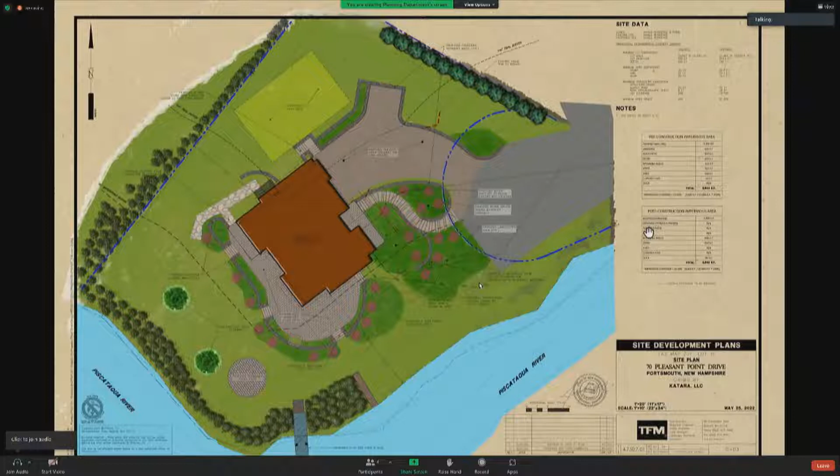I think we're good. Wait, don't have any questions. You wanted to proceed with it now? Is that what you said?

Yeah, we should vote on the first one, I think, at this point. At least discuss it. Is that all right with everybody? Myself and my team, happy to address any questions.

Yes, Jen. I'm not sure, maybe this is part of the wetlands application, but in this packet you talk a lot about the silt socks you're talking about doing on the shoreline. Do you know what type of mesh you're going to be using? I know they have different options. Some are organic, but they do have a polypropylene and polyethylene one, and that would be concerning to me if there's a bunch of plastic mesh sitting right there on the river's edge.

Yeah, I believe that's addressed on our sediment and erosion control plans, and it does reference organic fill. And that would include the mesh from that particular product? That's a good question. I don't remember reading that, I just remember seeing organic fill. There's no plastic, we typically spec the organic mesh, the coconut fibers or similar. That's our typical reference on an erosion sediment control plan. Without reading every note I can't say directly, but I was trying to find it too. There's a lot of words, a lot of stuff in there.

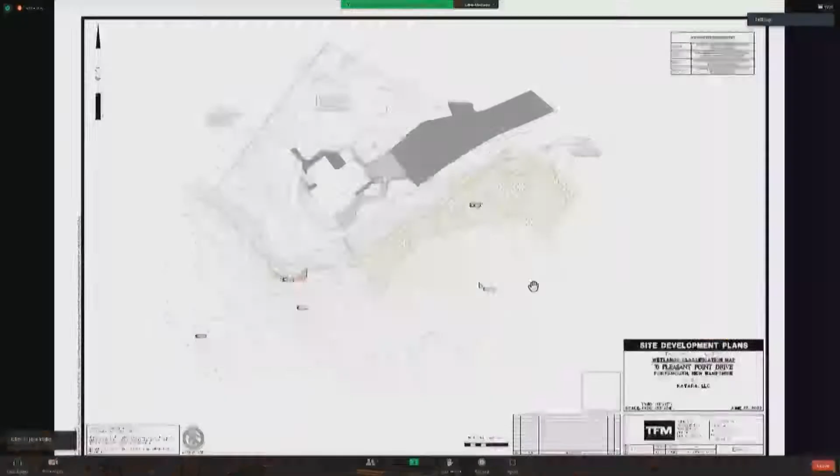Thank you. Yep, the first plan within that wetlands permit application is entitled a wetlands classification map. This plan is required by DES, and it simply classifies the different types of wetland adjacent to the property. There are 4 different types of wetlands, therefore 4 different classifications of wetlands here. The description of each type is located in the upper right-hand corner. You can see there's some salt marsh that has a different classification than the water body, and then based on what's growing and the quality of that wetland and the tidal flats, there's 4 different classifications of wetland.

The second plan is a wetland impact plan, shown as sheet EX02. This plan quantifies total buffer zone impact. The orange area represents the permanent impact. Total permanent impact is 11,993 square feet. The red hatched area represents temporary impact, about 3,750 square feet. All impacts, whether temporary or permanent, with exception of the dock, are within previously developed uplands of the tidal buffer zone. The dock impact from mean high water out to the end of the float represents about 886 square feet of impact.

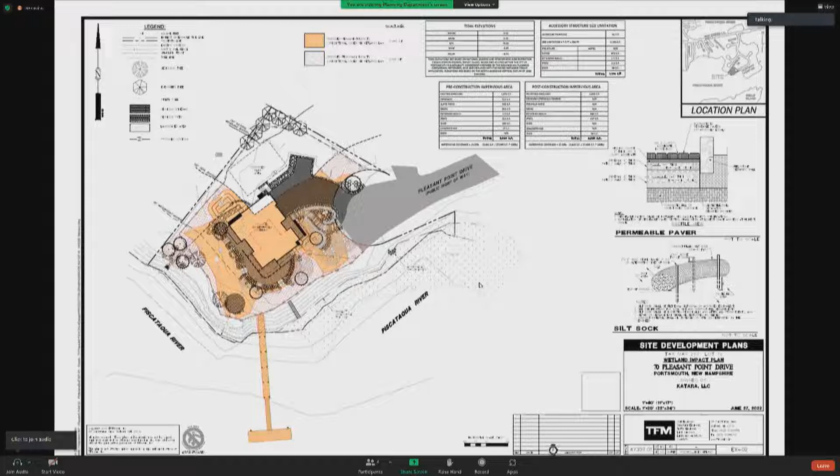The third sheet, labeled EX03, is a shoreland impact plan. This plan demonstrates those impacts beyond 100 feet, the 100-foot tidal buffer zone. Anything beyond this buffer and within 250 feet requires a separate shoreland permit. Impacts proposed within jurisdictional areas of the Shoreland Water Quality Protection Act are a small portion of the home, the driveway, a portion of the retaining wall around the driveway, and yard grading. Permanent shoreland impacts are about 1,200 square feet, and temporary shoreland impacts are about 3,633 square feet.

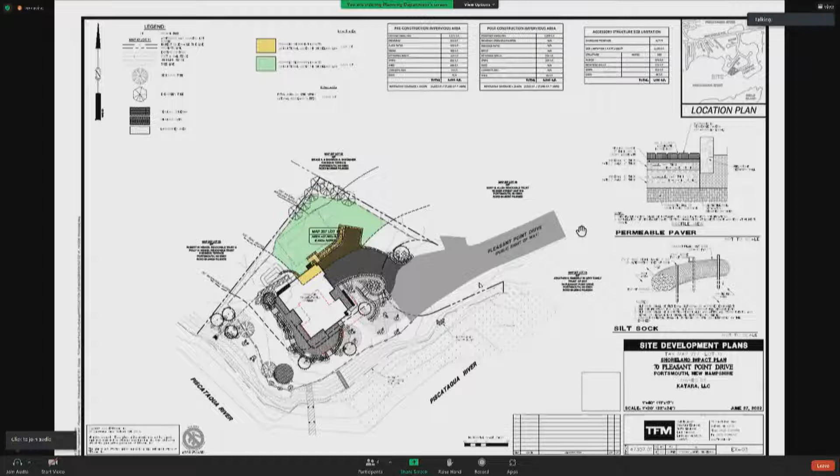EX04 is a vulnerability assessment. This plan demonstrates the site's vulnerability to relative sea level rise and projected mean higher high water elevations. The plan view on the left depicts the current location of the mean tide line, the mean high water, and the mean higher high water with reference to this site. The plan view on the right depicts the same three lines for the year 2100. Because the site's elevation is steep, elevated, and has banks adjacent to the resource, the site has a very high degree of tolerance for flood risk, and no action is required.

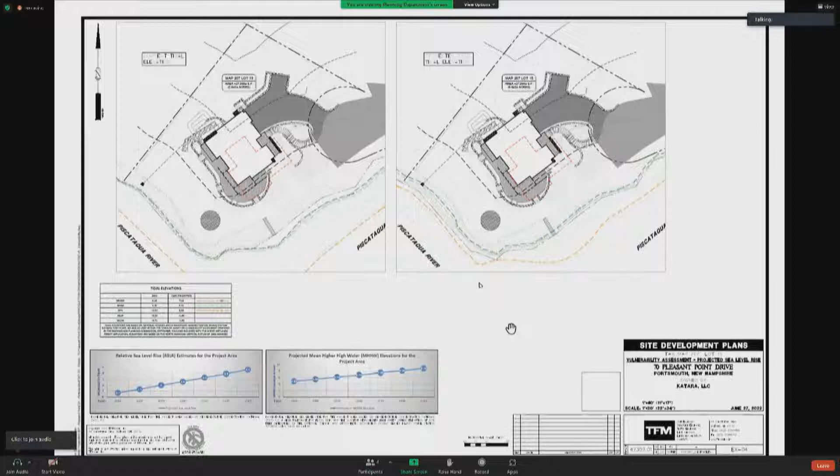Sheets 5, 6, and 7 are dock-related plans. Sheet 5 depicts the dock location with reference to the site, the mean tide line, and the mean high water. This plan also provides the dimension of the pier, the gangway, and the float. The right side of this plan depicts the proposed dock in relationship to the existing and proposed dock across the back channel of the river on Lady Isle.

Commission members may recall, I think it was three, maybe four months ago, was before this commission permitting that dock on Lady Isle, just across the back channel. So on the right-hand inset, it shows the entire resource from bank to bank and its relationship to that dock that was recently permitted a few months ago.

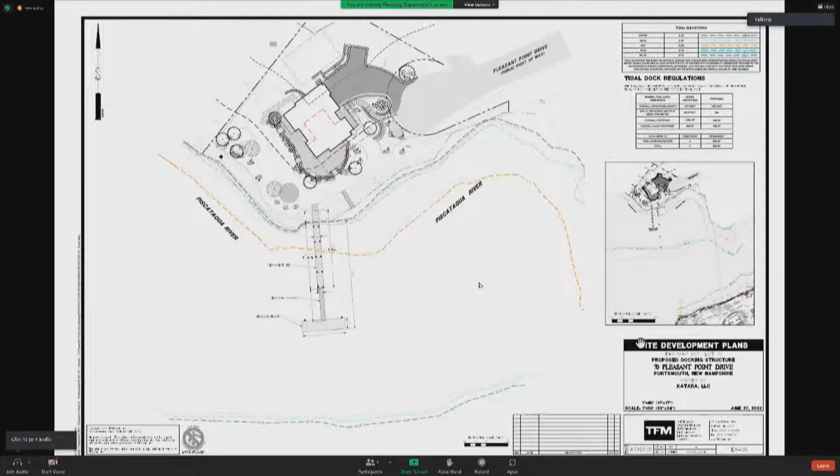Sheet 6 provides the dock details, a cross-section. It provides construction notes for the contractor, who will be, we believe, Riverside and Pickering Marine, and a profile depicting the dock with the mean tide line and the mean high water elevations below. The elevations shown here are as they exist today, where sheet 7 depicts the dock with reference to those three lines, mean tide line and mean high water, as projected for the year 2100.

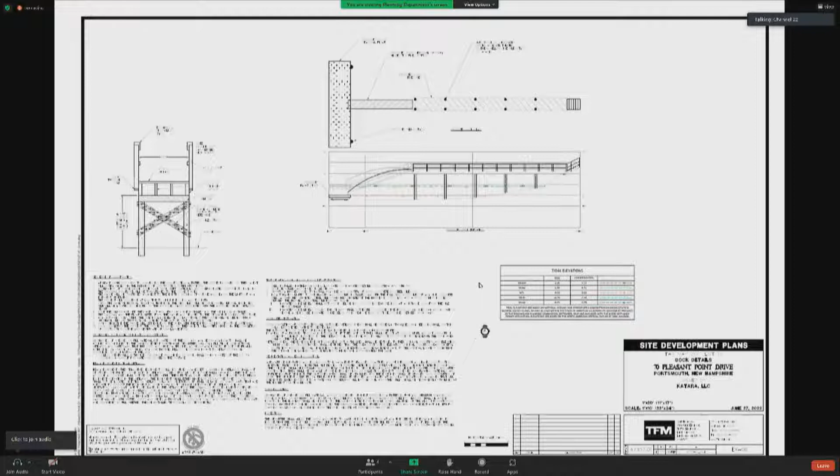Don't want to go through the entire wetlands permit, however, we have prepared some slides that summarize the application. If we could bring up those slides, please, Peter. I'll take you briefly through those.

And that is this document.

Cory: Sorry, I just had a question. So the pier and gangway will be taken off site to be stored?

Yeah, it has to come out. The dock, pier, and gangway has to come out. The gangway and float have to come out, and the pier as well. Yes, that's correct. And it's going to be stored off site? I don't think there's room on site. Becky, it'll be stored off site? Yes, it'll be stored off site.

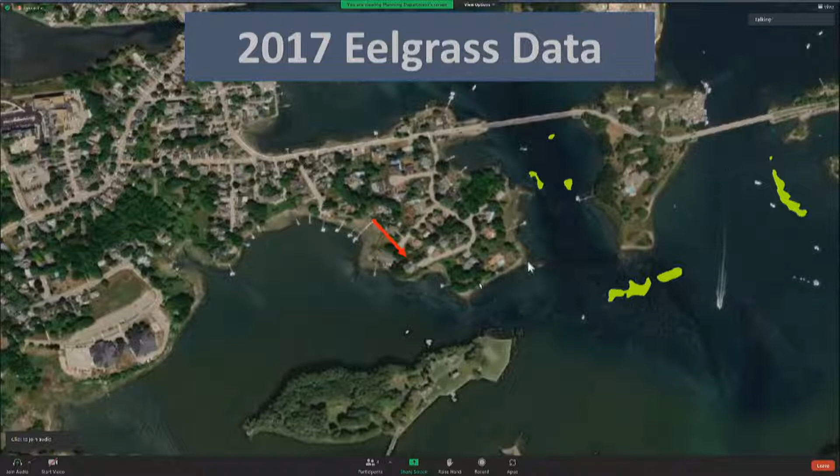That means these beds are growing, but still our site has no impact to these eelgrass beds, nor will the dock that we're proposing have any impact, because they are quite a distance away. This site has a data layer required by DES that requires us to look and determine the prevalence of shellfish. They are in the area.

However, next slide please. You can see that this site, or this water body, is closed to shellfishing. Although they're in this adjacent resource, there is no shellfishing allowed in that back channel of the Piscataqua River.

The next slide shows the salt marsh data. This represents the salt marsh in the area, which was also observed at our site walk. You can see that thin band in front of the home, which expands quite a bit as we go eastward.

The next slide is the UNH SLAMM model. Those of you not familiar with the SLAMM model, it's a sea level affecting marshes model, which was done by the University of New Hampshire. This slide shows with 1.5 feet of sea level rise, there is no effect really on that salt marsh to this site. The next slide shows the SLAMM model with 3 feet of sea level rise.

And again, because of these steep banks going down, there is very little salt marsh migration proposed adjacent to this site. There is salt marsh migration, I think, with sea level rise on the outskirts, but not adjacent to this site because of its steep banks and higher elevation.

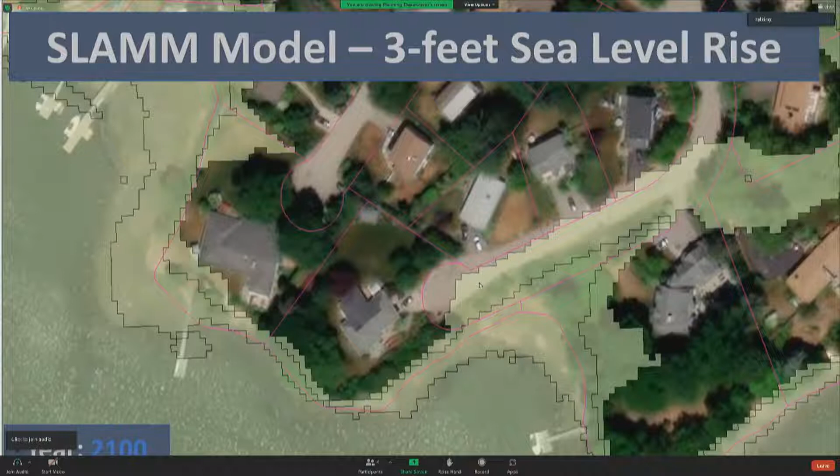One thing I'm not sure we noted previously, but the property to the west, and then just to the west of that, there is a prime wetland. And that prime wetland has a 100-foot buffer. That 100-foot buffer does extend onto this site.

However, the only thing we're proposing in it is in the northwest corner, and the only thing we're proposing is some plantings and invasive species management. There is no impact other than plantings on the site within that 100-foot buffer. The purpose of this slide was just to demonstrate there is a prime wetland buffer there, but we're not going into it other than plantings and invasive species management.

The next slide demonstrates the New Hampshire Fish and Game highest ranked habitat in New Hampshire, and that's the pink area. While high-ranking habitat is nearby in the adjacent water body and salt marsh, it is not on the subject property.

The next slide is part of the wetlands application. We're required to do a coastal functional assessment. The next slide shows the results of that functional assessment.

This shows the adjacent wetland system is suited for a number of principal functions and values. The principal functions and values of that adjacent wetland are flood flow alteration, fish and shellfish habitat, sediment and toxicant retention, nutrient removal, production export, sediment shoreline stabilization, wildlife habitat, endangered species habitat, and ecological integrity. The overall ecological integrity score was 0.65, with 1 being the highest you can achieve. So its ecological integrity is above average.

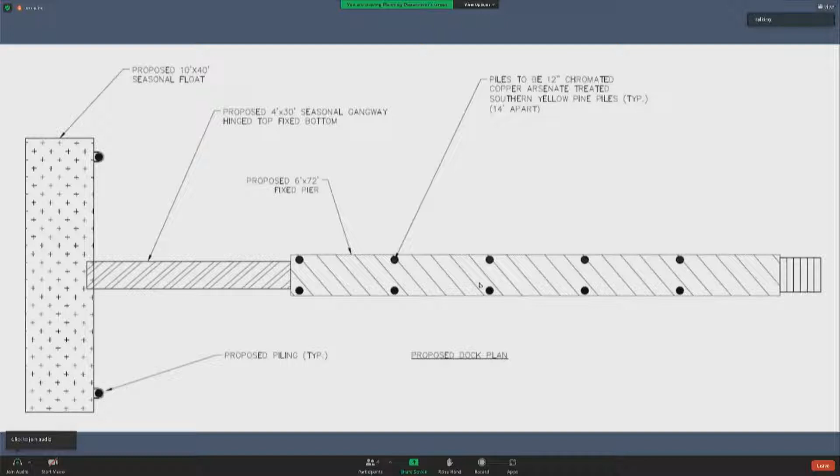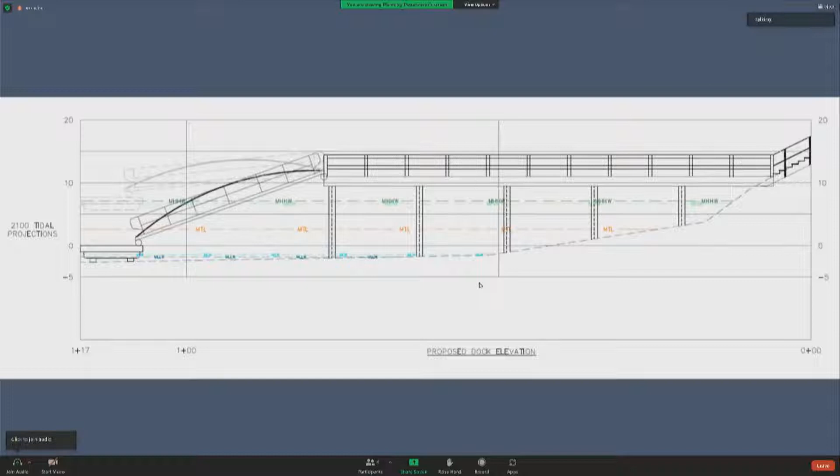Lastly, there's a slide that demonstrates the dock's proximity to the site, showing the pier, gangway, and float.

The next slide covers the DES tidal dock regulations. The DES maximum length is 200 feet; our dock is 100, half of that. We're allowed to go to 25% of waterway width at mean low water. In other words, DES would allow us to extend this dock 86 feet beyond mean low water to get that 25% width.

We're not even going up to mean low water; we're staying far short of that. The overall footprint allowed by DES is 1,500 square feet, and our docking structure is 886 square feet, a little more than half of what's allowed. The float footprint is maxed out, mainly due to boat slips, allowing a boat to dock there. It's 40 by 10 — you need that 40 feet to dock a boat.

As part of this permit, we've coordinated with other state and federal agencies, including the Chief Harbor Master, Tracy Shattuck, who issued a statement within the application that the proposed docking structure will have no negative effect on navigation in the channel.

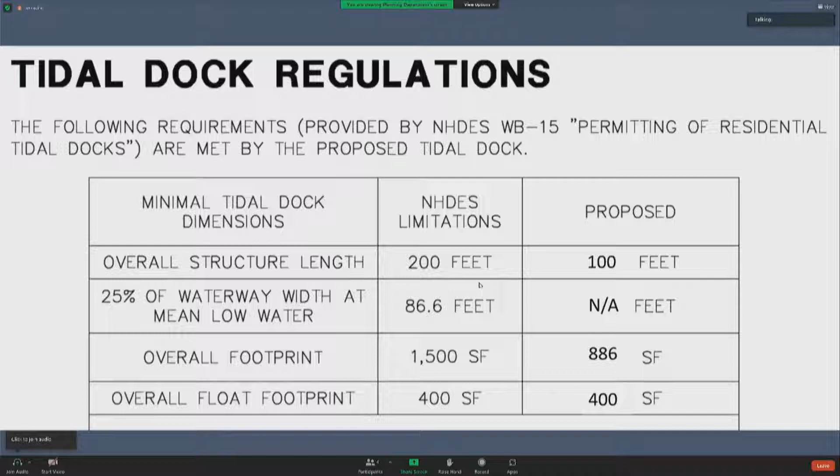We've also coordinated with the New Hampshire Natural Heritage Bureau, which determined that marsh elder is on this property, away from the impact area. The next slide shows the location of the marsh elder, circled in red, and its relationship to the impact of the site. This marsh elder is to be preserved, as there's no construction activity proposed within close proximity to it.

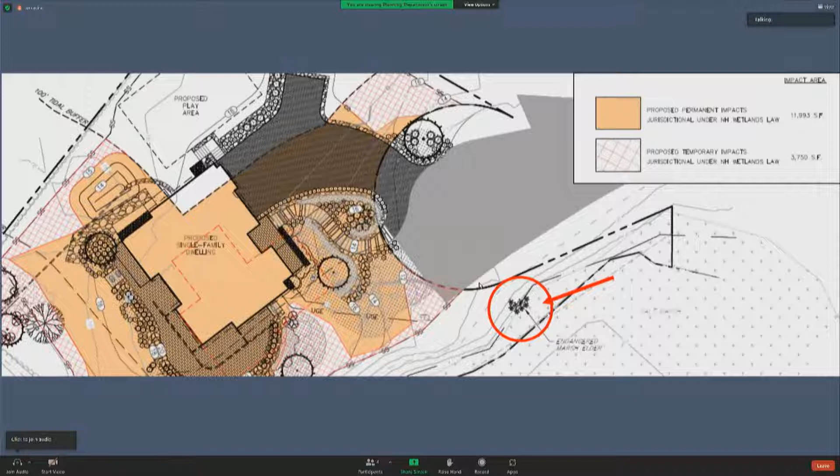Lastly, we've coordinated with the New Hampshire Natural Heritage Bureau's Jessica Bouchard, who issued a statement of no concerns about impacting the marsh elder as a result of this project.

We've also consulted and coordinated with marine biologist Mike Dion of the New Hampshire Fish and Game Department, who issued a statement that this project will not adversely affect sturgeon species. You're probably aware there's the Atlantic and short-nosed sturgeon species prevalent in this Back Bay channel, and that's really why there's a restriction on dock construction in late winter, so as not to impact those species.

So that's a summary of the state dredge and fill permit application, which includes both tidal buffer zone impact for the new home as well as the plantings and the docking structure. Happy to address any questions.

Thanks, Corey, I will start. I do have one question regarding the kayaks and the kayak rack structure that was at the bottom of the stairs — will all that move to the dock now?

No, the kayak rack is intended to stay where it is. The reason being, as you come down the stairs, they wanted the kayak next to the stairs, on a flat area. If we move it over to the dock, that would mean the kayaks would be in the water.

In order to reduce the stormwater going in their direction, we have a holding tank area that's actually going to divert it back towards this low spot. And that's mainly for the reason that we can't increase stormwater in any direction. We have to look at all of our outfalls and make sure we have a decrease in every direction. So most of the stormwater heads to this low point here.

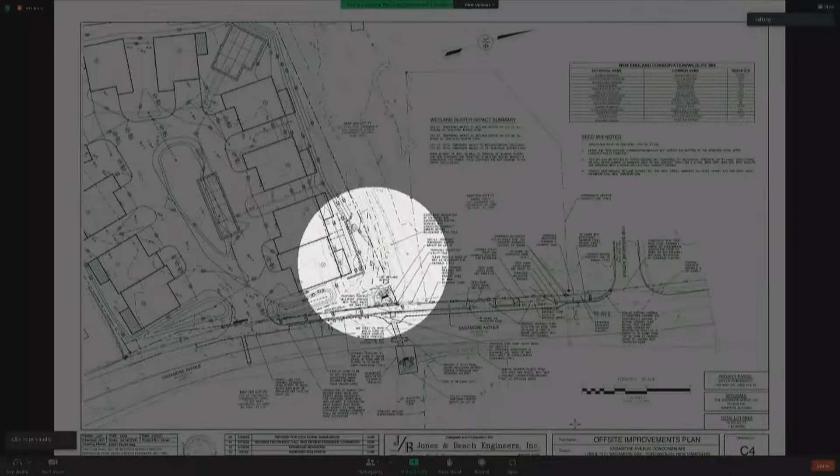But there's a small percentage that does head out back towards Sea Cove condos behind us, but we'll be stopping that. They have a detention pond right on the other side of our property line also that we were trying not to have our water go into.

Other questions? Samantha? Okay. Samantha does have a question. She does. Oh, good. Samantha?

The staff memo recommended a one-year-long monitoring plan of the invasive species that were removed, and then the planting plan. Is that something you're amenable to? Yes.

And then my other question was if you were also amenable to practicing organic land care management practices on your larger parcel there, as all that is ultimately going to flow into the wetland area, even though it will be treated. Is this reference to the NOFA standards? Yeah. You familiar with those at all? Jim is. That sounds fine, right?

I'm getting one yes and one 'I don't know what it is.' Okay.

I assume it's basically no high strength fertilizers, low strength - eliminating synthetic pesticides and fertilizers. That sounds fine, and that's something we can add, both of those would obviously be conditions of anything you vote on and can be added in the condominium documents too. Great, thank you.

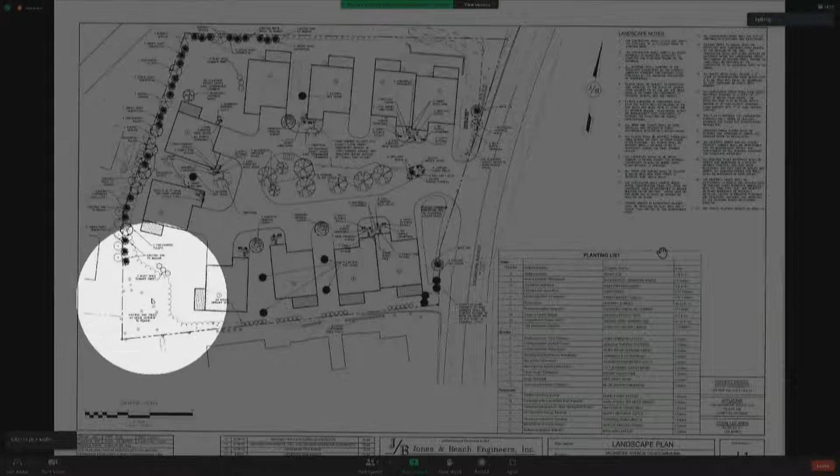And then we have the ability to keep some of the trees over in this corner as well, but the rest of them pretty much are going to have to be cut and replanted for the construction of the houses, the driveways, and the stormwater system.

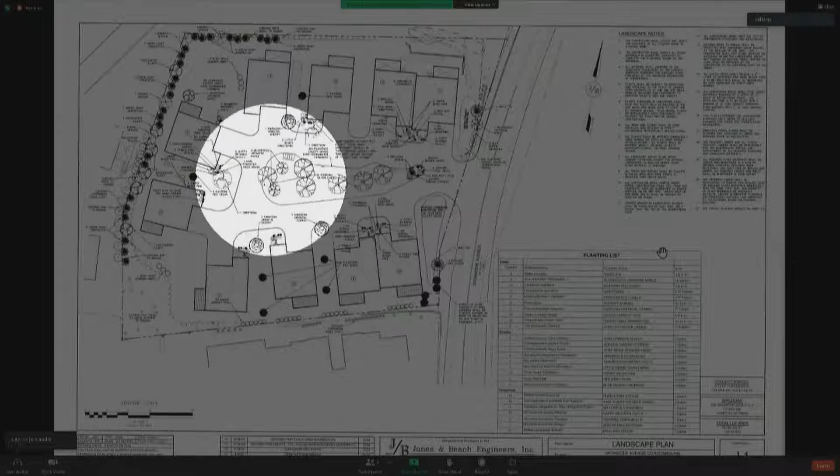And then this is the trees to be replanted. We have a thick buffer along these two property lines. We have an agreement with the abutters. Some of these trees are actually on their land to even help buffer their property more. We have a large green space area in the middle, and then we'll have planting for each of the units and between the units. So we'll have to replant a lot of the existing trees that are out there.

But we're able to, I think, do that with lots of green space around this. It looks better in color, but you'll see that there's quite a bit of space for green.

I think there's no other question. I'm going to go out on a reach a little bit too, on the other property, just to ask a question about the snow storage, because it kind of connects with a little bit what's going on in the culvert on the outfall there. My understanding is that where you're storing the snow, in the center there, there's underground storage of stormwater, and then that outlets to the culvert?

Is that right? Everything gets treated before it gets outletted. So everything on our site, any of the rain or snow that's on the pavement or in that center area gets treated before it has an outfall. So even the snow will be treated if it's stored there. Any of the snow around the outside of the edge of pavements gets picked up and brought into treatment areas. So there is adequate space for both snow storage and the stormwater treatment.

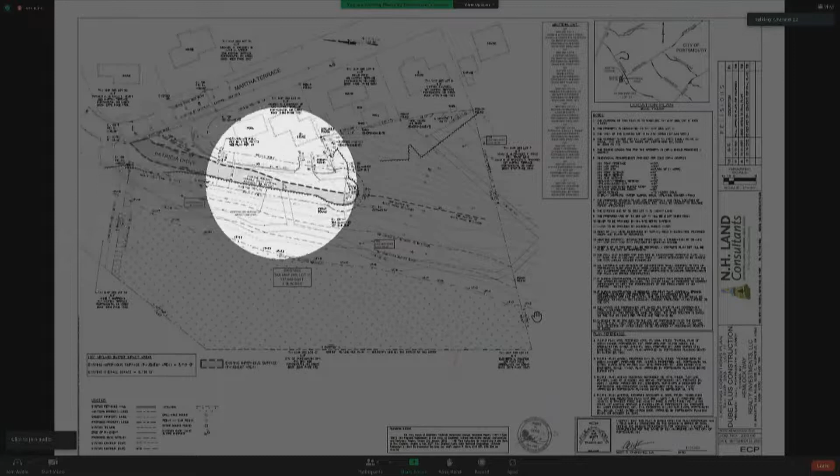There's an existing roadway infrastructure already in place along this right-of-way, right off of Martha Terrace. It was intended at one point for the road to go here, shown on the plan. I think it's the top button. So this right-of-way here is existing, both on paper and in the field. There's existing pavement and existing drainage infrastructure in place, and it's currently, as depicted in the darker shade... I'm pressing the wrong button again.

The darker shaded area is the current area of impact that's in the prime wetland buffer. So we're looking to actually have a reduction in the total prime wetland buffer by removing all the existing asphalt and repaving the road narrower. I believe we're doing 18 feet versus the 20 to 24 foot wide pavement that's out there now. We weren't able to determine the exact existing width, but we probed and figure it's about 20 to 24 feet wide currently. So we'll end up with a reduction in impervious surface within the buffer.

But because we are impacting the buffer, we needed to go before this commission and the planning board for a conditional use permit. We've also gone before the state NHDES for a prime wetland buffer impact. We've received those permits, and we're also having to pay into the compensatory mitigation program, the ARM fund, for the impacts.

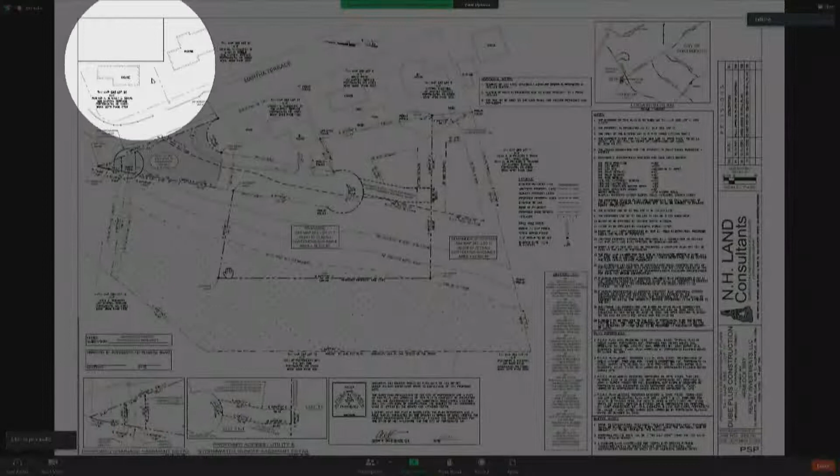That section of the right-of-way was actually dedicated as part of the plat recordation back in 1960-something, along with all of Martha Terrace. So the Martha Terrace roadway and this little section of roadway was dedicated and accepted by the city, so it's owned by the city. The rest of the right-of-way is owned by the abutting parcel, so the rest of the unshaded area here is all owned by the abutters to the north and south of the right-of-way.

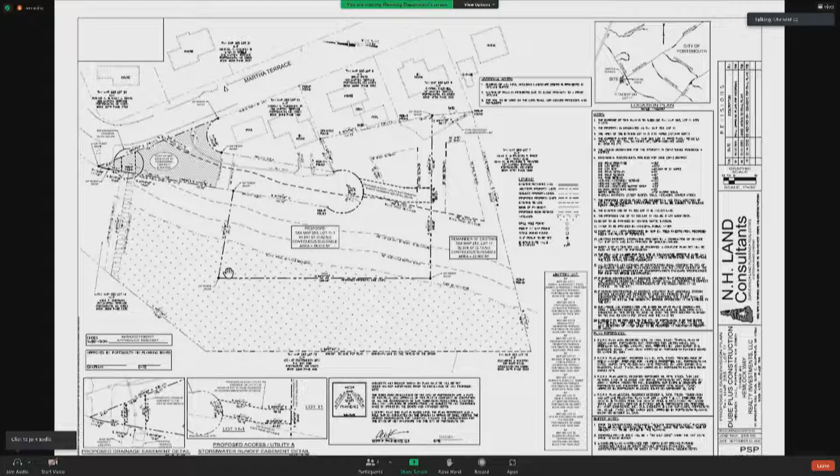So, having not been on the site, I'm wondering why the road couldn't swing further away, toward that 100-foot buffer line, if we swing it a little bit further that way. Is it because there are a bunch of trees there? If so, I don't want to bother them.

So I'm saying, through that right-of-way, why can't we move it closer to the 100-foot prime wetland buffer you have delineated? I'm wondering why we can't curve the road a little further away from the wetland itself.

Well, two things. One is that we're mimicking the existing roadway, so all we're really doing is removing the asphalt and repaving in the exact same spot, which is already disturbed area.

Secondly, along the easterly side of the property, if you can see where my cursor is in the middle of this circle, there's a retaining wall that runs all the way along this edge of the roadway, and it's a significant grade change.

There may be, it may be shown in the photos, Peter. Actually, on this plan it's hard to see, but on this sheet there's topo that shows it's a little steeper up there. It's like a hill.

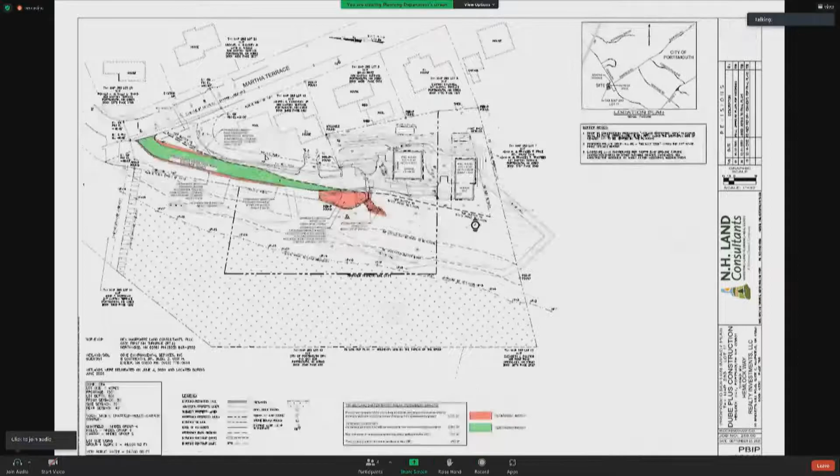And Peter, if you look at the photos I submitted along with the CUP application, you'll see. There should be a photo showing that retaining wall. So we're getting as close to that wall as we can, and you can see the pavement. It's in good shape, but it was paved back in the early 70s.

It was all constructed, and then we're maintaining all of those trees on the westerly side of the right-of-way. Those have all been marked with conservation flag tags, so no cutting, what have you.

Another question is, why can't the snow storage be next to the houses?

Well, as it's designed, the snow would be pushed—Peter, I don't know if you can go to, I think there's two sheets in where it shows the driveway plan. So the snow storage would naturally be, as they're plowing, they're going to wing it to either side. I guess they could look to winging it towards the easterly side of the road.

And that would allow the snow to melt and get into the collection, into the drainage structure, which is a proposed rain garden. Ultimately it's going to be pushed as they're plowing, because it'll be one plow operator doing the roadway and the driveways. It'll be privately maintained.

It's going to be privately maintained? It is, yep, the roadway will be all privately maintained. So that one area we were talking about before is part of the city's right-of-way, the city council is deeding that back to the landowners, so it'll all be privately maintained.

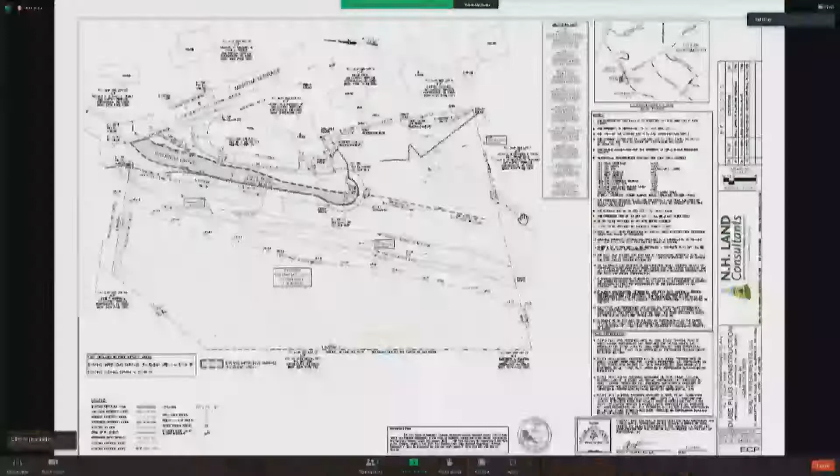Have they owned it ever since? Yes, since the 70s, they had owned it for many years. I'm not exactly sure how many years they owned it, but we recently acquired it, I believe in July of 2021. Who recently acquired? We did - Hemlock Realty Investments LLC is current owner of the property.

So it's spot on spec - you're going to build two houses, and they're both going to be sold to somebody not in your family. Probably, more than likely, correct, yes. Okay.

I guess that's all I've got. Okay, thanks. Lynn? I had sort of a similar question, just thinking about - I know our role is really just to look at the road, which is in the 100-foot buffer - but just to clarify, so you're building two homes, and then does this road open up any additional space for development down the road?

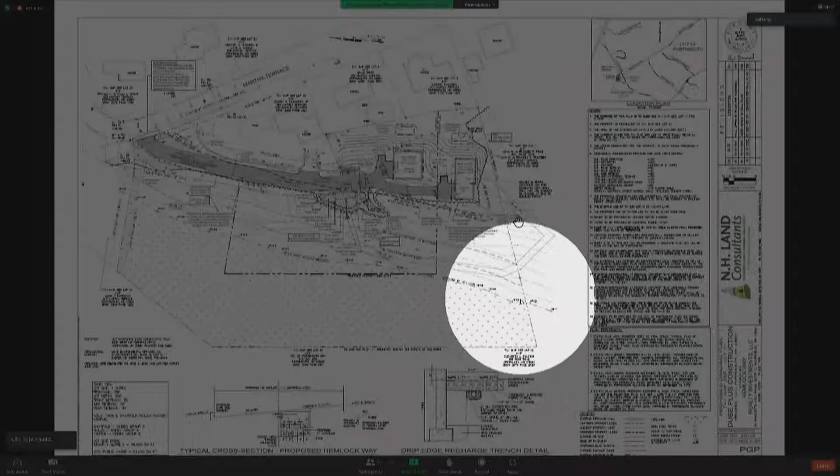It doesn't. So the property line is right here - this property line is the end of our property, and it's undeveloped land back in here. The road was intended, if you look at the old subdivision plans, to go all the way through and then back up to another Patricia Drive on the other side, but it ends in another cul-de-sac.

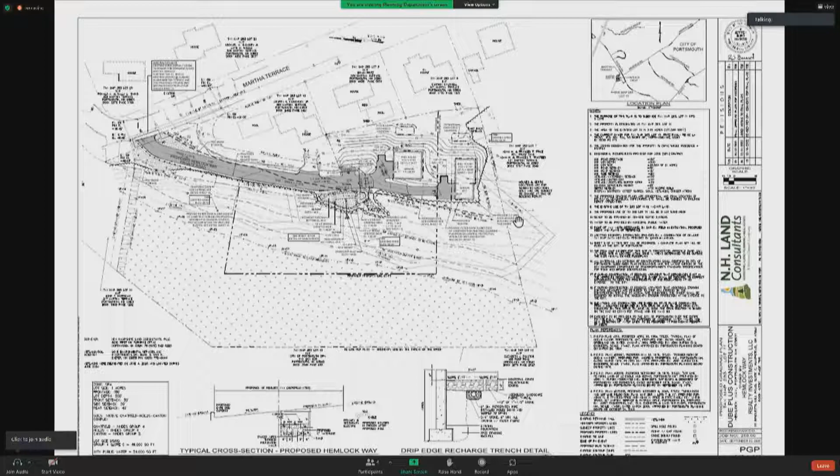It was intended to connect there, and the plan was to do - can't recall how many lots there were in a future phase, might have been another 15 lots or something like that. But that can't happen going forward, because we have no ownership of that parcel, and per this plan there will be two homes in the way, so I don't think there will be any ability to connect through.

And I'm assuming that's part of your role, Peter, looking at long-term planning - is this an area where you're hoping to have some additional residential development? No, but if the property meets the zoning and they can figure out access - there would be, I think it would be really challenging in this location because it's so steep back there, and there's no connection without going through private property. So there's no other right-of-way that would connect to this that I'm aware of.

So they would basically have to create a road through someone's yard. Right, yeah, so I think this is going to be the end of that development. These are just the last two outparcels they were able to use—like you said, there was a lot more platted, but it never came to fruition. So this is what they came up with in terms of a design that would work with the new wetland regulations. Right, okay, so if they had built it back in '69, they probably wouldn't have had to deal with the wetland regulations—there wouldn't have been prime wetlands. But since they didn't, they're more limited on their site here.

Okay, that makes sense, thanks for that background, because I missed it—I wasn't here for the first time you came before the commission. I do have a follow-up.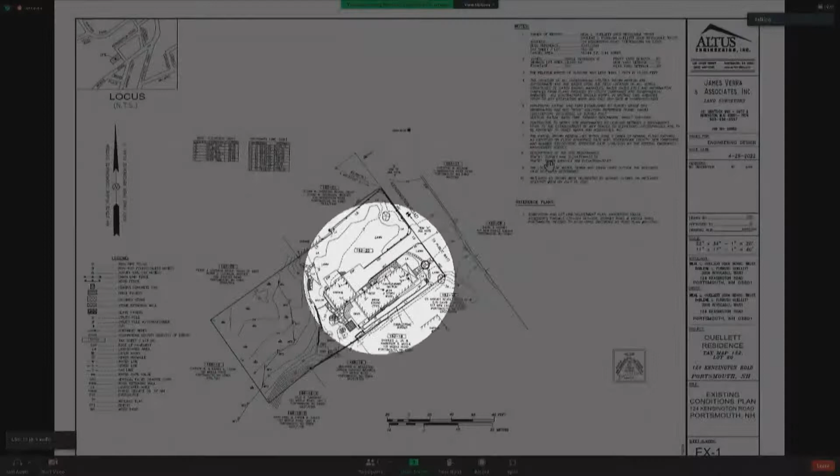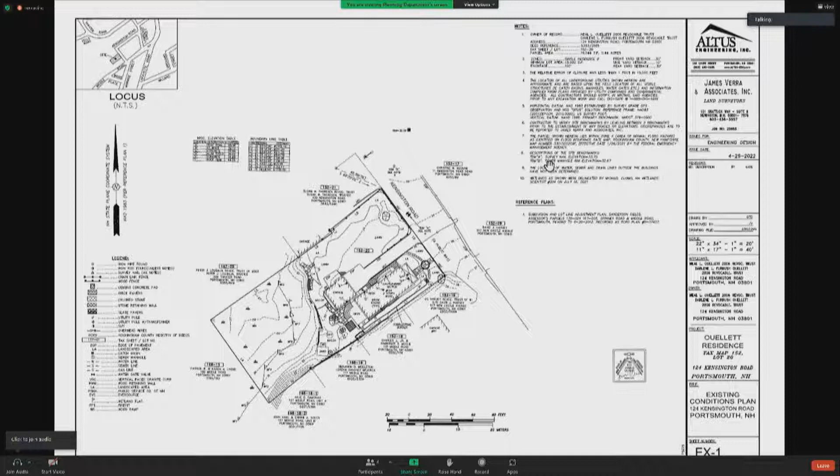How do I switch this sheet here? Oh, I do it. You do. Sorry, I have no control. Nope, you're killing me. Yep. Okay, perfect.

So as you can see, the wetlands is in the back portion of the site, and the 100-foot buffer encumbers almost the entire parcel. The building envelope that's outside the 100-foot buffer and meets the front and side yard setbacks is a tiny sliver, which includes the front part of their home and just a little bit of their driveway.

So what they want to do is, they have a detached garage, basically at ground elevation, only a couple feet away from the existing home. What they want is an attached garage. To build that, you actually have to push it a little further away because the finished floor of the house is about 4 feet above grade, so you have to figure out how to go from grade and get up 4 feet. That's why the building is pushed over further.

We've moved it away from the wetland system so that we can actually increase the buffer in the backyard area, and we're also proposing some vegetation improvements in the area.

So I think we have a pretty complete application, a very reasonable application. We're only adding about 800 square feet of impervious on the lot. The patio in front is going to be permeable materials, and everything drains away from the wetland for the driveway area. The roof pitch is down the middle, so there'll be stone drip edge in the back. We're looking for some input before we file the formal application.

It's further away from the buffer. It's a complete redo—you're ripping up the garage that's there and building a new one rather than putting it where it is. I would really like to see it further away from the buffer, and I would like to see that entire driveway be porous as well.

But I don't have an objection to the driveway being porous. I think we can work with that. Moving it further forward changes a lot of the flow in the house, it changes structural issues, and keeping it in its location allows you to minimize impacts of rebuilding a significant portion of the house.

We are moving it further away. We're not having any hardscape traffic areas in back. We're treating all that water that's coming off, and we are increasing the buffer and providing more native plantings back there.

Yeah, but you're increasing the impervious surface by 764 square feet. Correct. Is there anything that you're doing to improve that? We'll offset that easily by making the rest of the driveway permeable.

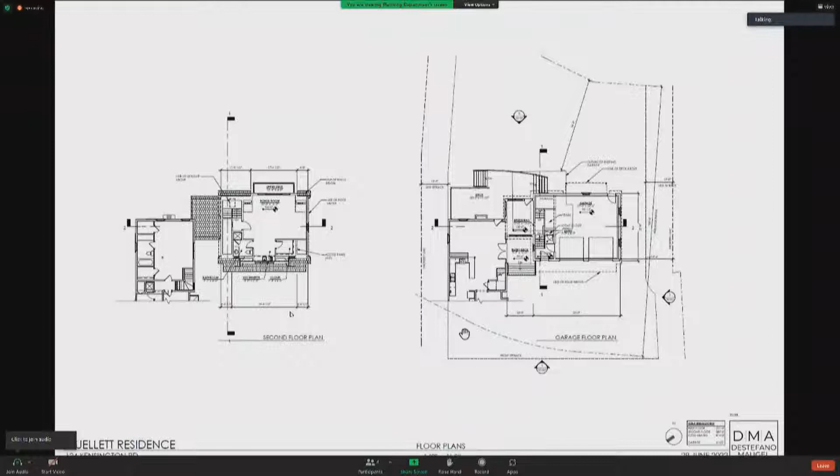Do you have some sort of information to show the layout of the house? That would be helpful. I think the architectural plans may be in the packet. I don't know if we included those or not. I don't see the existing house here. There's the garage floor, the new plan. There's the back one—that's, I think, the only floor plans. So that's the floor plan, and that connection point is where the existing doorway is today. So moving it forward would interfere with the stairs going to the second floor.

Go, Samantha? When you do come back before us with the actual application, it would be really helpful to see photos of the existing lot and the wetland. I'm having a hard time visualizing what's there now, so that would be very helpful. Meaning the vegetation or what? We can provide photos, but yeah, vegetation.

Also just to get a better sense of how close the existing garage is to that 25-foot no-cut buffer, what's kind of in that no-cut buffer now, where this new proposed garage is going to go, just generally what the vegetation is like there, and grade and things like that.

Okay, so the plan—we have a grading plan. We also have on the site plan showing the built infrastructure. There's some retaining wall in that area and bark mulch. There's very little built infrastructure today in the

25-foot no-cut buffer. The primary activity other than enhancing the buffer is all between the 25 and 50 foot. So we're not really doing anything in that area. If you go to C2, you can see that 25-foot buffer line.

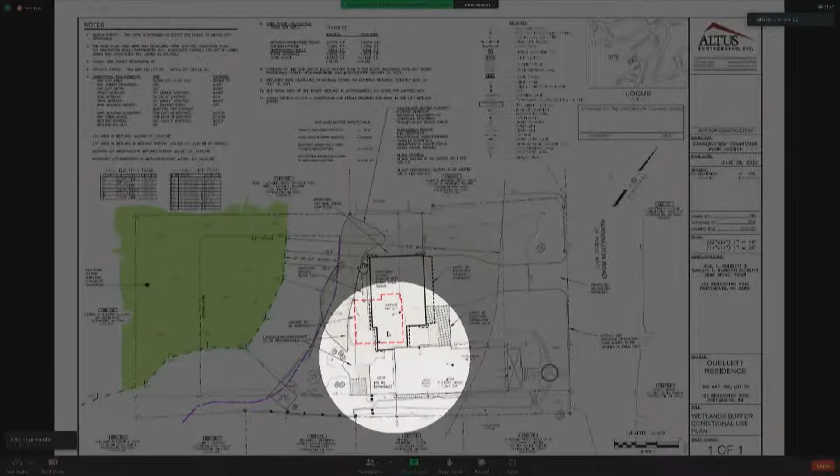Yes, that is the area that will be temporarily or permanently disturbed through the activity, including some regrading, work for the foundation, and the building itself, and so forth. So anything in the buffer that will require some regrading. Thank you. And that's our full impact area, temporary and proposed. Gotcha, thank you.

Other questions? Yeah, I think a site visit would be helpful. I'm kind of feeling like it'd be good to see, when you say you're coming in, if you move it forward you've got to come in by the stairs, and I know you're moving it a little bit back, but this is all in the buffer. The whole lot is almost totally in the buffer. Yeah, but that,

moving it back a little bit but increasing the size that dramatically, it's kind of hard. And so the garage itself today is basically non-functional because it's so small, you can't get two vehicles in it. That doesn't mean it's non-functional.

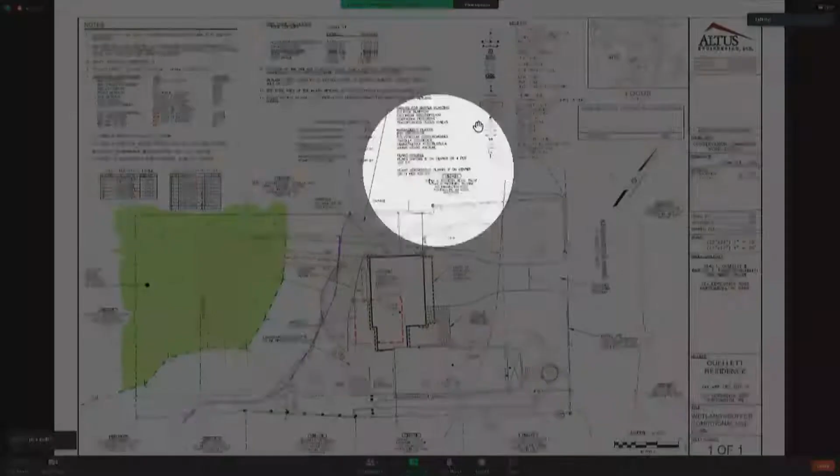To get the information later on the plantings, when you... The plantings are right there in the center. Yeah, right there's the information on the plantings, a plethora. Is there any feedback on the plantings at this point?

What's there now? Is it just grass? What is there now in that area? Actually, right behind the garage and on the side is dense raspberry, not that small, pretty large raspberries, and then there's just a variety of mature plantings in there. There's some oaks, there's a variety of plants and trees.

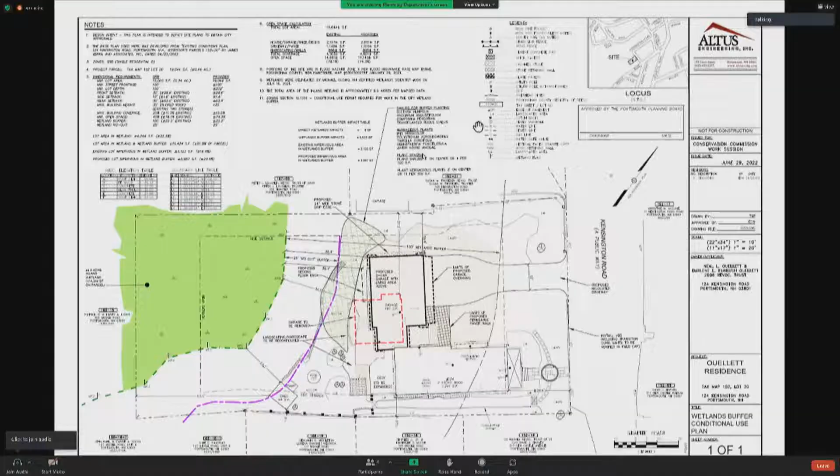So this does represent a significant kind of re-landscaping of that area? That's what I'm trying to get at. No, it's not.

Yeah, there's no intent for a lawn in back at all. So it's just like a little enhancement is what you're proposing? Absolutely. Little extra plantings? I mean, yeah, that'd be fun. It's a great little spot. I've been enjoying it for 20 some odd years.

Sounds good. So pretty much what's going to get disturbed is the lawn, correct? Yeah. And we have no issue on making the driveway all permeable.

Okay, no other questions or comments? We'll schedule a site visit. Yeah, so how do we do that? Do we do it now, or do we do it through? We'll send out an email and get some dates to everybody and try to get it so you have some time before the next meeting. Okay, great. Yep. Thanks, Eric. Thank you. Thank you very much.

Okay, next item on the agenda is our 99 Pierce Island Road, the pool house.

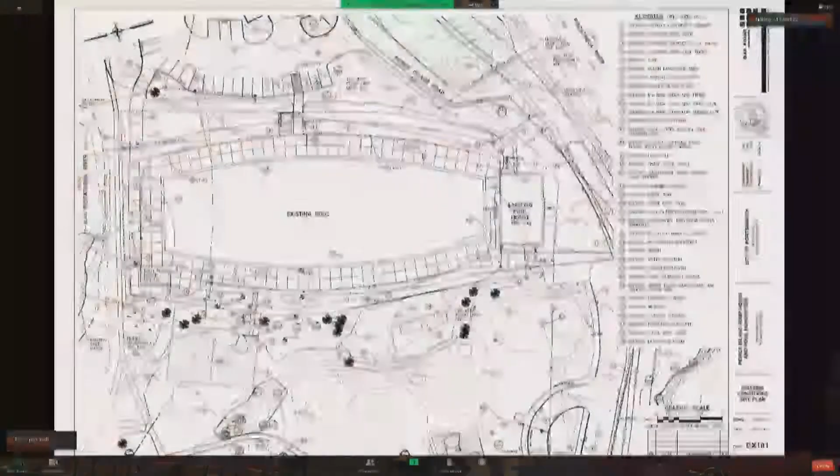Thank you. Good afternoon. So just a brief overview on the Portsmouth Pool project. This is the overall existing site plan. The project primarily is a complete renovation of the entire pool and the pool systems.

Oh, I have, which sheet do you want? Yeah, this is perfect, this is good, the sheet right here. Okay. So that top button, if you point it right at the screen, yeah, there you go.

So the overall pool, this is the overall pool. So again, the entire pool will be renovated. The liner will be replaced. The gutter around the pool will be replaced. All the associated piping and pool systems are going to be replaced.

And as part of that, the pool pump house is going to need to be replaced. Currently, that's located on the northwest corner of the pool house, of the existing pool. It's located within the 100-foot tidal buffer zone. Just off the edge of the sheet is the Piscataqua River. This line represents the 100-foot tidal buffer zone.

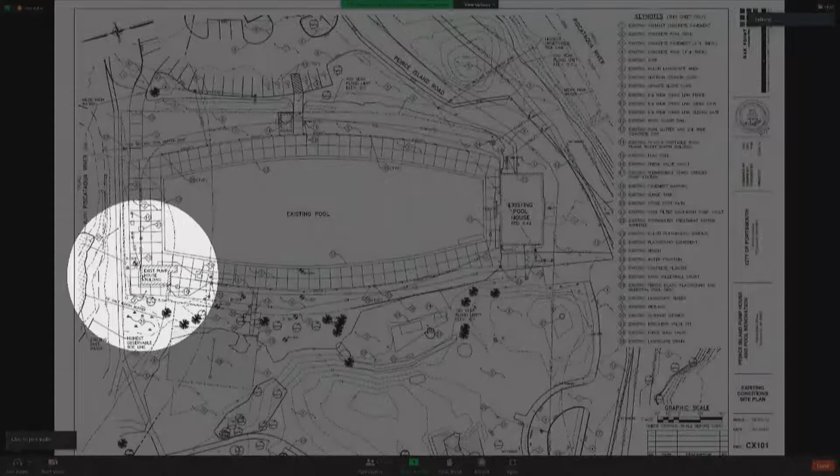So because we're going to be reconstructing this, we'll be removing this pump house. Doing this disturbance within the 100-foot tidal buffer zone is going to trigger the wetlands permit, so we're going to be submitting a standard New Hampshire dredge and fill permit as part of this project.

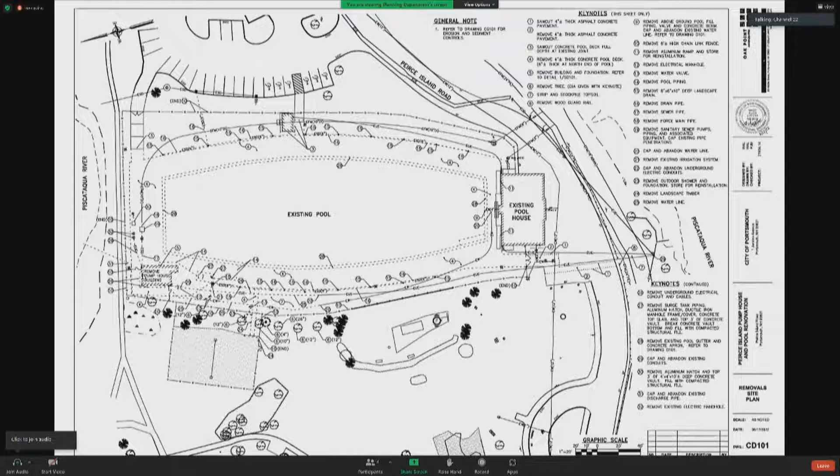If you move to the next sheet, one more sheet beyond this - this is the proposed layout. So this would be the area where that existing pump house is located. We're actually pulling that back and constructing the new pump house outside that 100-foot tidal buffer zone.

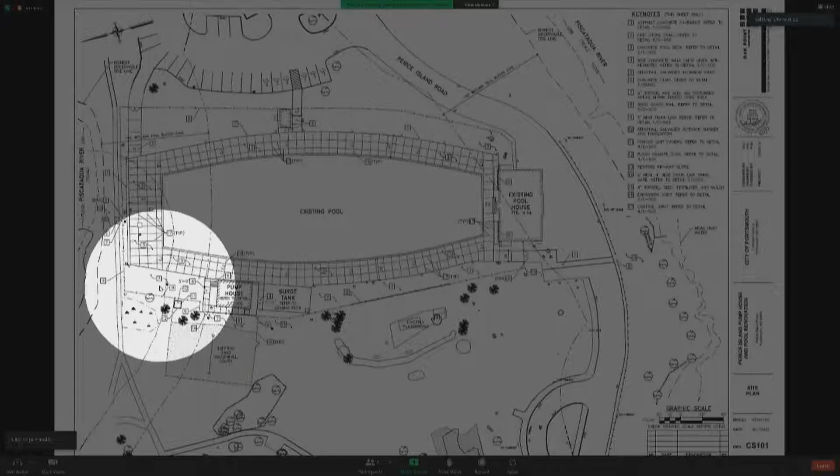The area that's currently here will be just restored to turf. There will be temporary disturbances required as part of this project within that 100-foot tidal buffer zone. The pool deck in these areas is going to be removed and replaced in kind. The layout of the pool deck isn't changing, so that'll be a temporary disturbance.

So the overall disturbance for the project within that 100-foot tidal buffer zone is about 9,000 or 9,200 square feet of temporary disturbance. That would be primarily the removal and replacement of that concrete deck, and the turf areas adjacent to that will be disturbed.

There will be some 1,443 square feet of permanent disturbance. That's the area where the existing pump house will be removed, and that's being restored with turf.

And then as part of this, there's currently a drainage system that exists around the west side of that pool. It's a very shallow, under-drained drainage type system with small landscape drains. Right now that system is apparently clogged and not functioning well. We believe that it actually discharges out to the river on that west side. I believe that pipe is actually further out, and it may be filled with sediment because of where that's located.

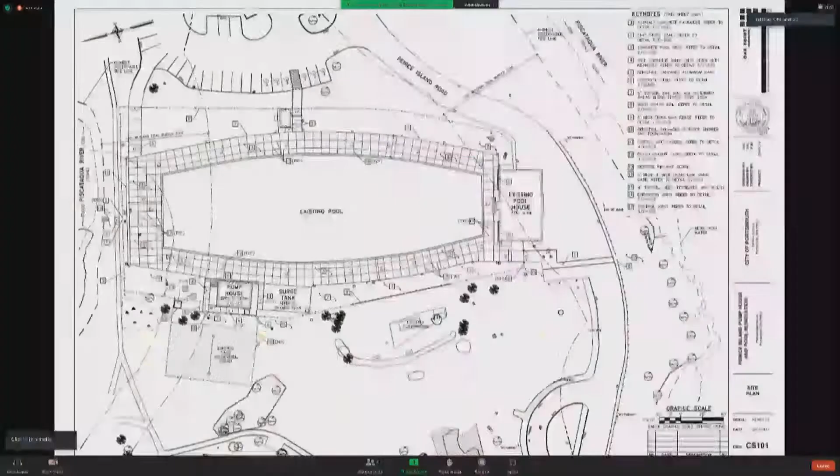And I'm not objecting, but I think there's misinformation in stating that the Conservation Commission said there was no area to mitigate. They haven't put anything in there about trees, and although we can stipulate it, I still don't feel that it's a complete application.

Elizabeth, did you want to expand on some of the missing items? Why don't you come up - just introduce yourself, thanks.

Hello, I'm Elizabeth Oliver from Normandeau Associates, the wetland specialist who's been assembling this permit. I apologize that this permit is not in a completed state - we did have to assemble it rather hastily. Perhaps the big glaring missing item is the resource information, which I'm sure everyone has noticed. Part of that is I am not a certified wetland scientist as of yet, I do not have a stamp. The person who is certified, who delineated all these resources, has been unavailable to assist me with working this up, so I'm still waiting on information from him to complete this permit application. Given the short notice, I wasn't able to get him to help me with that.

In terms of additional information, much of it is related to determining the compensatory mitigation, being sure that the ARM fund payment will be accepted by NHDES. I've had a great deal of difficulty getting a hold of them on the phone and getting email responses, and even trying to coordinate a pre-application meeting, which we really should do in this case, along with a site walk. I'm just not getting much feedback or response. So I apologize that the application is not more complete, but if there are questions, I would be very happy to try and answer them to the best of my ability.